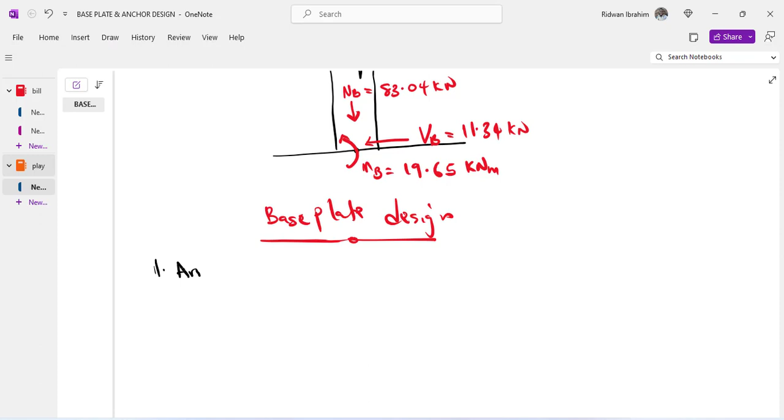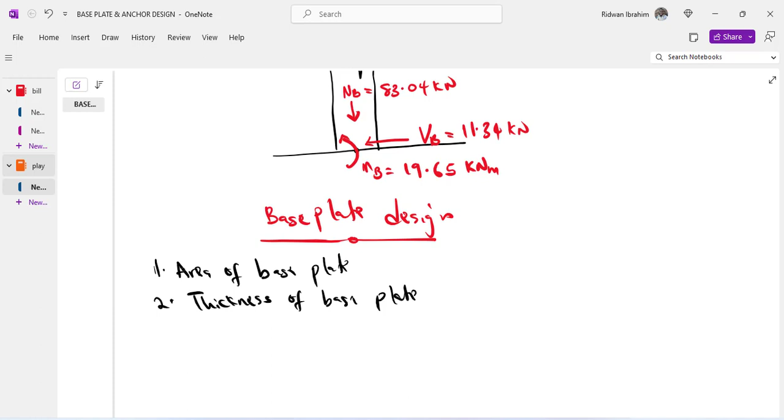So when we say we want to design a base plate, what does that actually mean? What are we designing in base plates? So we are only designing two things in base plates. Let me change the ink. So the first thing we are designing is the area of base plate, and second thing we are designing the thickness of base plates, and that is all. These are just the two things we want to have.

You can't just say, okay, let the surface area be 200 by 200 and use a thickness of 5 mm. No, you can't just say that. You have to show us the structural calculation so that we can know that this is enough. Because if the base plate is not adequate, then there's no how the axial force coming from the column will be distributed. If you have axial force, you need to first of all distribute it over an area, right? So if that area is not wide enough, then you are not doing anything. So that is what we mean by base plate design. We are trying to get the adequate area, and then we are also trying to get the adequate thickness.

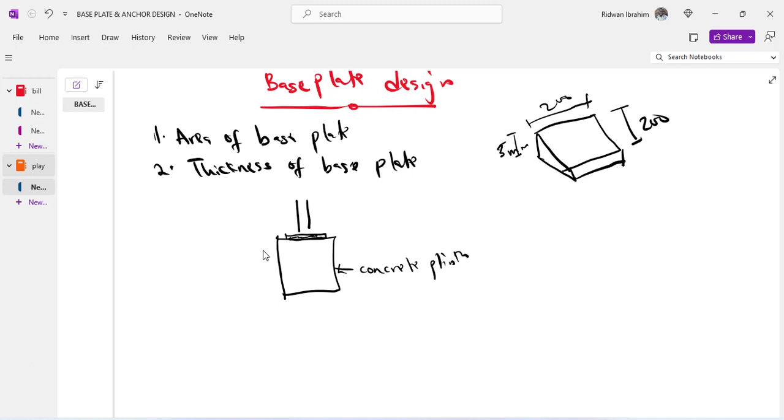So the first step in doing this analysis is that we need to know the bearing pressure of the base plate. So basically, when you have a base plate, let me have a kind of elevation. So this is my plinth, which is concrete plinth, right? And then you have your base plate on it. So you have base plate, and on this base plate we have the UC beam, and then this UC beam most times will be welded to the base plate, so that's the connection between that.

And then the base plate will now have to be connected using anchor bolts, right? So the two things we are trying to design here, we are trying to design the base plate and we are trying to design the anchor bolts. So that is the scope of this structural analysis. So now if you see this, the base plate is actually sitting on the concrete, right? So the bearing pressure is the pressure at the base of the base plate. So if this is the base plate, we're expecting that there's a pressure under it, right?

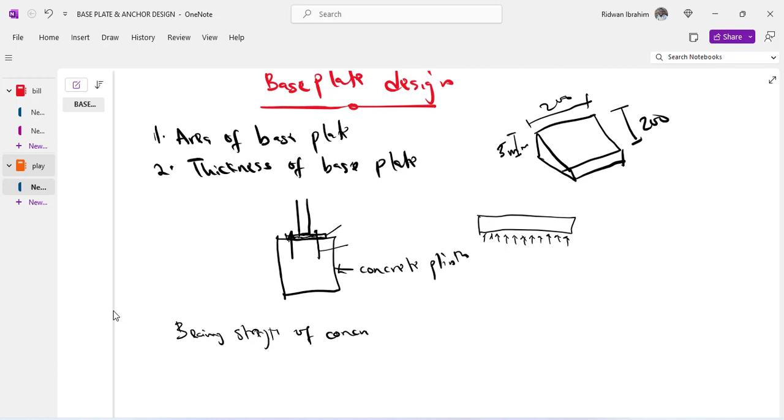And that pressure is a function of the kind of material it is supported on. So if it is supported on a concrete plinth, you are expecting a particular kind of pressure. If it is supported on masonry, you are expecting a kind of pressure. If it's supported on mortar, you are expecting a kind of pressure. So we have to know what the bearing pressure under the base is. So I would just say the bearing strength of concrete plinths, the concrete plinth is what is supporting the base plate.

So that is equivalent to 0.6 fcu. You can check the Eurocode for that, and we have said our fcu is 30 N/mm². So now I want to calculate the area of the base plate, and in order to calculate the area of the base plate, I first of all need to know what the effective area of the base plate is, because it is the effective area of the base plate that will give me an idea of what the area is. So what do I mean by effective area?

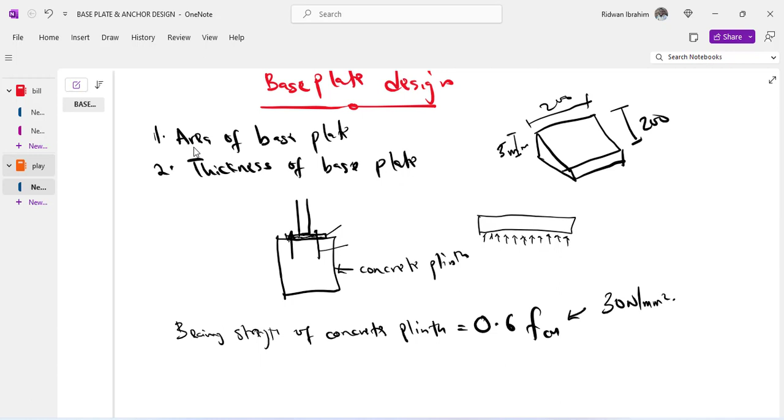So this is what it means when you have a UC beam. Obviously it is a UC column that is connected to the base plate, right? So I will just have like a plan view. So if you have the UC column like this, that UC column that is connected to the base plate, what I'm saying is that the effective area of this is something around like this.

Okay, so the effective area of the base plate is expected to take the shape of the element that is attached to it, because that element is applying the pressure. So if this is our UC beam, as I said, from a position up to here, which is called C, I know that the pressure coming from this base plate will not pass a particular distance upward here, and that particular distance is called C. Also, from the side here, the exact thing it will apply here is like C. Also from here to here, C.

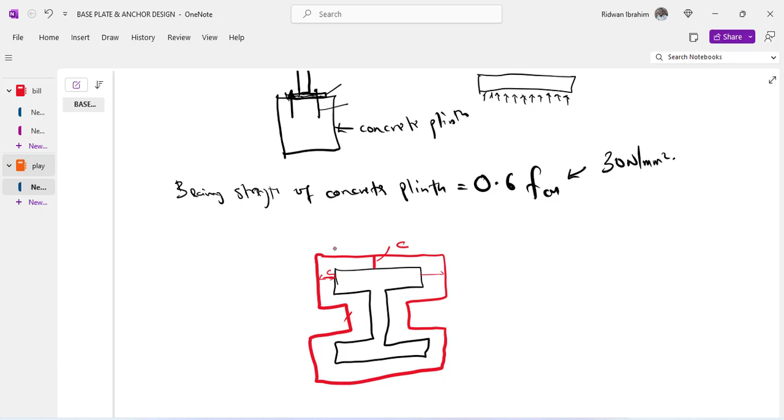Okay, so we can say that the distance from here to here we can call 2C plus small t. I already said that from the edge of this column to this position is C. Also from this position is C. I know that the thickness, which is the web thickness, is called t, right? So this is C plus C plus t. So that is 2C plus t.

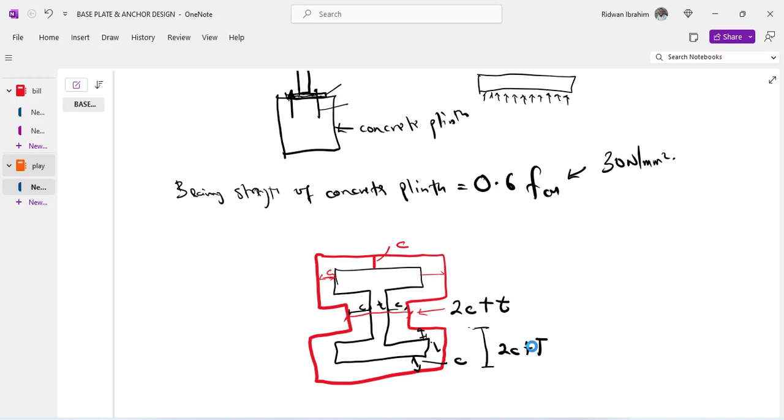All right, good. So the distance from here to here is C. The distance from here to here will be 2C plus big T, right? Because from here to here is C, also from here to here is C, and also this is big T, because the thickness of the flange is called big T. What I'm saying is that when you have your UC beam,

around here you are expecting that the pressure this will exert on the base plate is somewhere around like this. It will take the shape, right? All this shaded area. So all this shaded area is the effective area. So since you know that this is the effective area that the pressure of this base plate will be having, you are not expected to have your base plate anywhere in this shaded area.

So your base plate cannot be like this. If the area you are providing for your base plate falls inside this effective area, then it has failed, because the pressure exerted on the base plate from the UC beam is actually spread over an area wider than this. So this has failed. Do you understand that? So the area you are meant to provide has to be equivalent to this effective area or more. Definitely it has to be more. So the area you'll be providing must not fall inside that effective area. It has to fall outside.

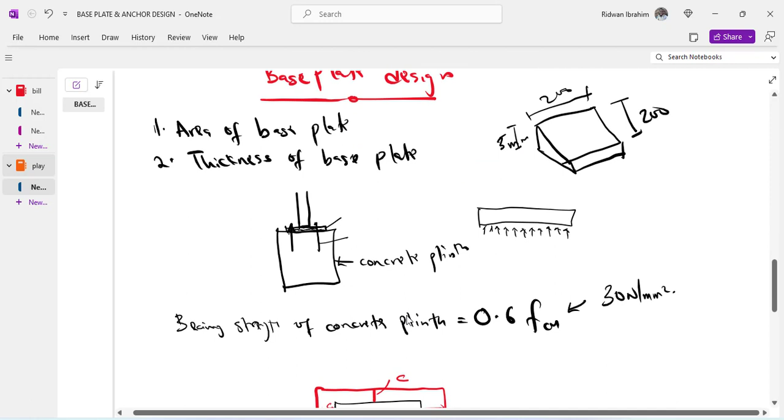So as I've said earlier, we need to know the pressure under the base, and the pressure is actually 0.6 FCU. This is the formula for the pressure, 0.6 FCU. So we can easily say that effective area is equivalent to what? Axial load from the column to the base plate. Let me just say axial load on base plate.

But when I say axial load on base plate, you know where it is coming from. It is coming from the column, and the load on the column is coming from the beam, and that is coming from the canopy. So it's equal to axial load on base plate divided by what? Divided by pressure under the base plate, which is the bearing strength of concrete, right? Bearing strength of concrete, or you can say pressure under the base plate.

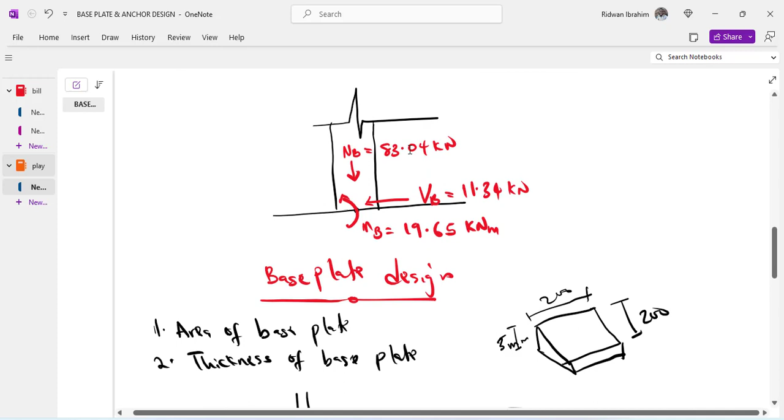Okay, so what is the axial load? That is 83.01. Let me see, 83.04, sorry. So that is 83.04, that's in kilonewton. So I want to multiply that by 1000 in order to convert to Newton. Don't forget that your bearing strength is in Newton per millimeter square, so I have to convert this to Newton too. So that's why I multiply by 1000.

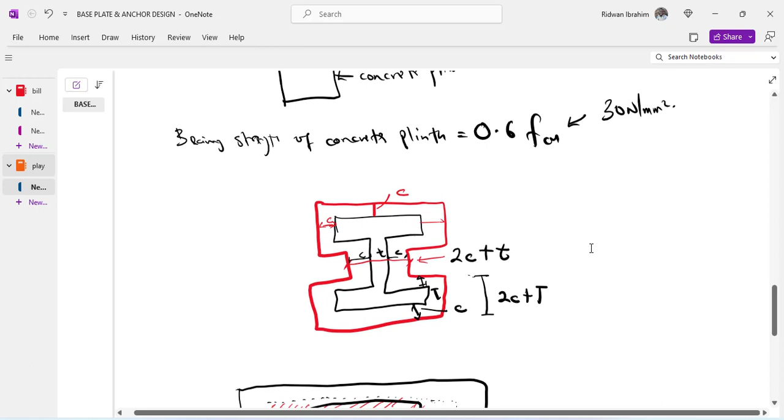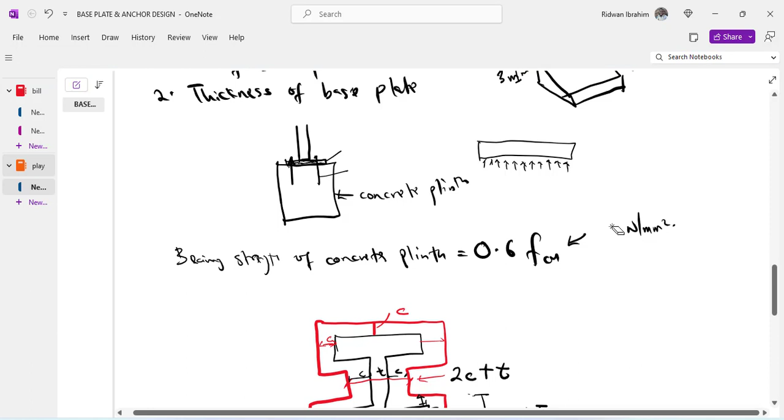And what's our bearing strength? I already said it, that it is 0.6 FCU. And what's our FCU? 30. Sorry, I'm just realizing that in the calculation that I have here, the FCU I use is 15. Okay, so I don't want to change that, because I will have to be pressing my calculator one more time, which I don't want to do. So I'll just change this back to 15, because I want to be picking the value from what I've calculated.

So from there, my effective area will now be equivalent to 9226.7 millimeter squared. Okay, so this is my effective area. This is what we just calculated. All this shaded area in red, that is the total area, effective area. So that is good. However, don't forget that we need to know the value of this C. Since I told you that from this position to this position is C, this is 2C plus T. So you can just have your kind of equation to get that.

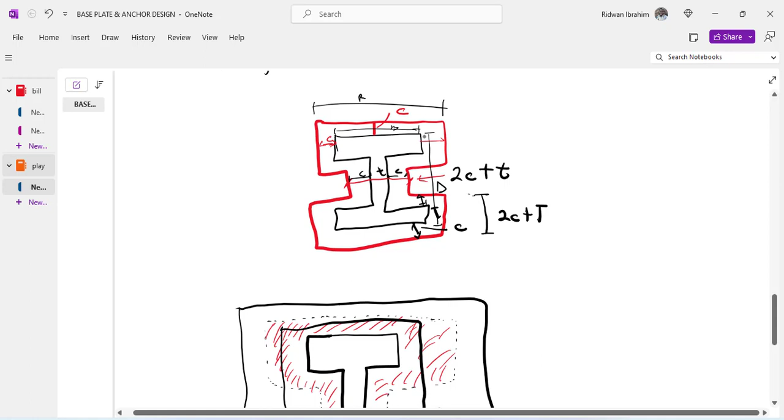Let's say for example, from here to here is B, right? From here to here is big D, right? Okay, so you can easily know that from here to here will be B plus 2C. Do you get that? And also from here to here will be D plus 2C. So you can just try to close this small portion down, and then have this. So this side is nothing but 2C plus T. So you can have three areas like this, right?

Here what you have is 2C plus T, and here what you have is B plus 2C. So you can get the area of this place, because this is a rectangle, so that's length times breadth. So B plus 2C times 2C plus T, you have the same thing here as well, right? So what is going to be the height of this? If the total length of this place is D plus 2C, then this will be D plus 2C minus 2 (2C plus T). That will be the height. And the width will be 2C plus small t.

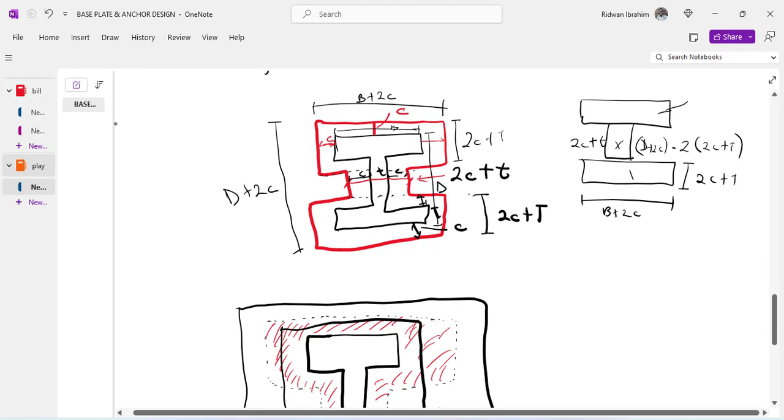So it's now left to you to calculate the area here, here, and here, and add it up. Okay, so you just need to do that small mathematics. That is what I'm trying to say, that you derive the equation here. So I would not go into that, but I think I've explained how you are going to get that. So I will just write out what I have derived.

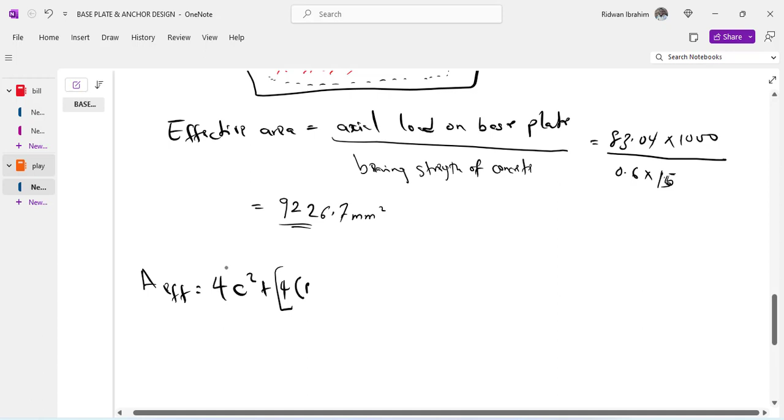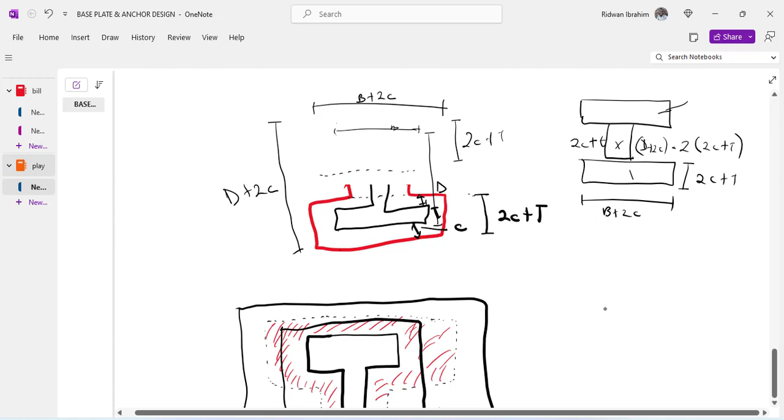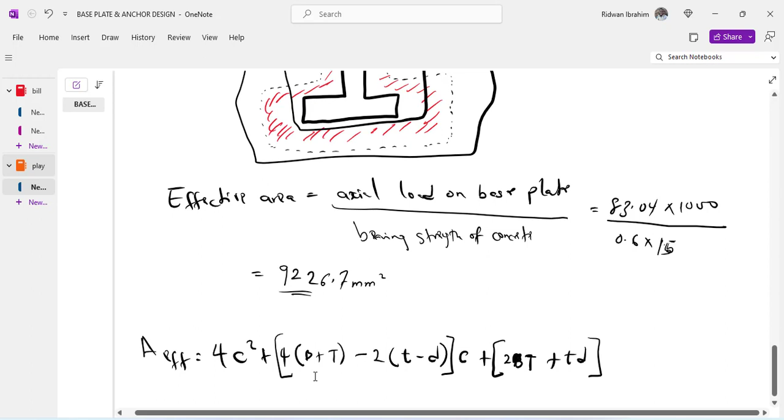So if you check textbooks, you might see that the way they write this formula is quite different, but at the end of the day it is still the same thing, because I have tried to put it in some bracket. Maybe they expanded the bracket. So you just need to derive that. Okay, and the easy thing is that all of this from here to here is basically the column perimeter.

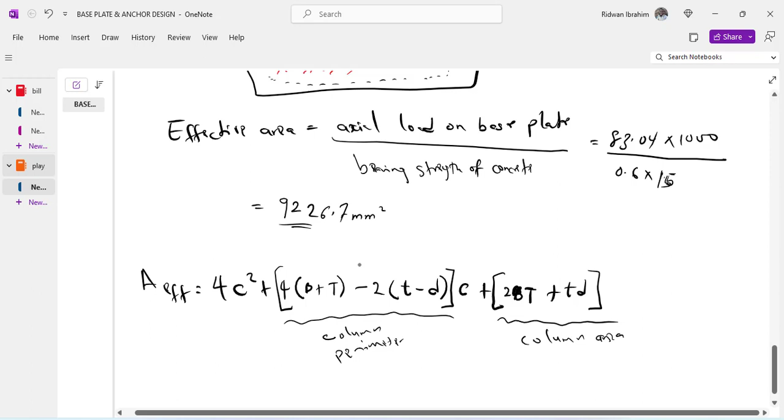Yeah, and all of this here is nothing but the column area. What I mean, the UC column. Okay, that's UC column area. This small equation, you can call it maybe equation 1. Okay, so I've already calculated what the effective area is, which is this.

Now we know what B is, we know what T is, we know what small t is, we know what small d is, we know everything. The only thing we don't know is C. Okay, what's our B? Don't forget that the section is 203 by 203 by 46, right? So you can just check your blue book so that you can get the steel property, or you can check online. Okay, so let's check it up online.

I'll just say UC properties, UC column section. Okay, so let's use this Rainham steel. Let's look for our section. Our section is 203 by 203 by 46. This is our section, right? Okay, so if you check, your mass per meter is 46.1. So 46.1 and 46 is actually the same thing.

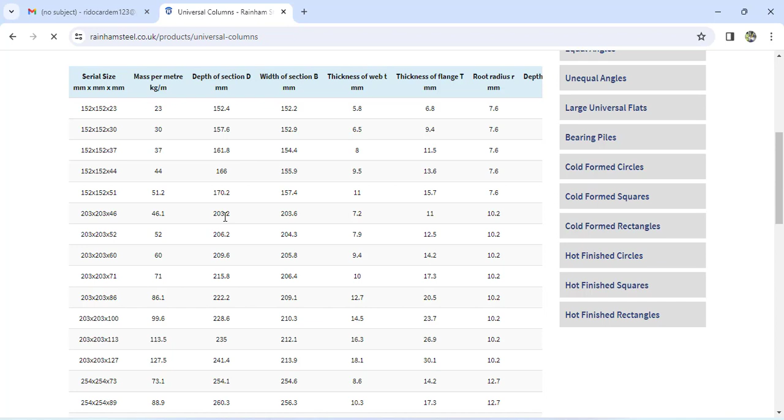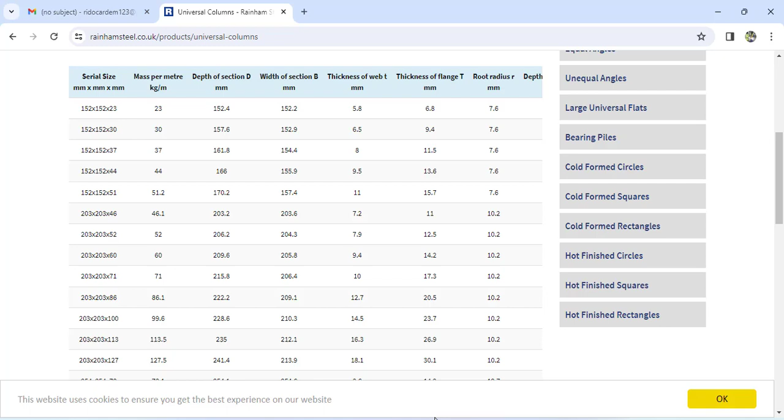And your depth of section, which is your big D, is 203.2. And your big B is 203.6. Your small t, which is thickness of web, is 7.2. Your thickness, which is big T, is 11. Okay, and I think that's all we need in this case. I just showed you so that you can easily get this from your blue book as well. So you can check blue book or online, whichever one is easy for you.

So I think my B is 203.2, okay, and the big D is 203.6, just as we checked right now. My big T is 11, which is the thickness of the flange, and my small t, which is the thickness of the web, is 7.2, and then my small d, 181 millimeter. Small d is equal to big D minus 2T.

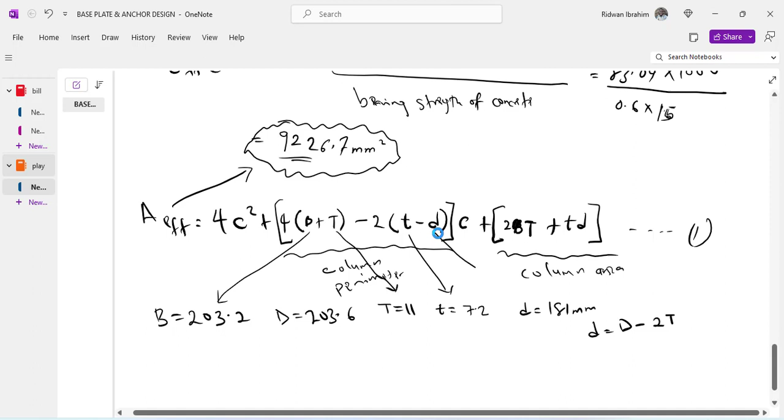So now all I need to do is put all of these values into here. You already know what your effective area is, this is the value, right? This is the value for B. This is the value for T. This is the value for small t. This is the value for small d. So you just go about that. The only thing you don't know here is C.

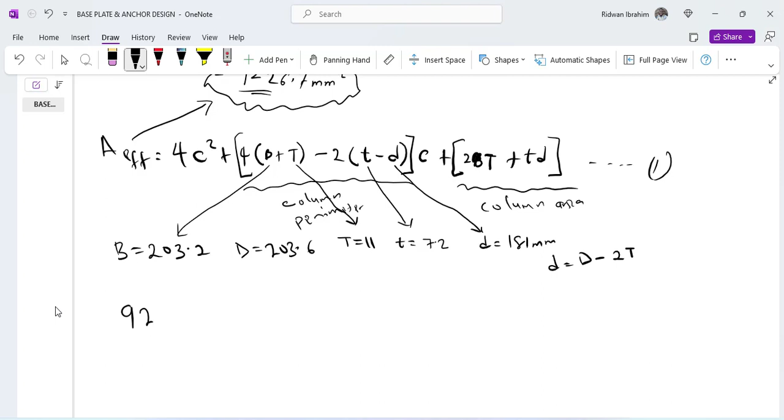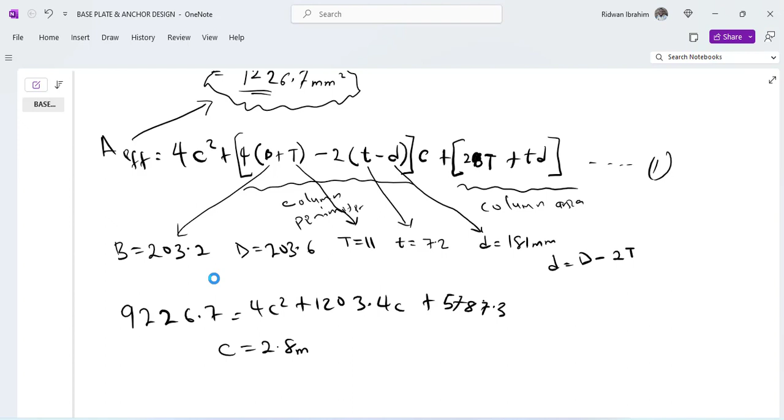So at the end of the day, when you put all of this together, I'm expecting you to have 9226.7 is equivalent to 4C squared plus 1203.4C plus 5787.3. So this is a quadratic equation, right? When you solve your quadratic equation, you'll have C equals 2.8 millimeter.

Okay, so as I said earlier, if you have your UC beam like this, I can say that my minimum area is a function of my effective area, because this time around I'm not having that zigzag shape. You don't expect my base plate to have a zigzag shape. So I'm going to have a rectangular or square plate, right? So something like this, but we are using the same concept.

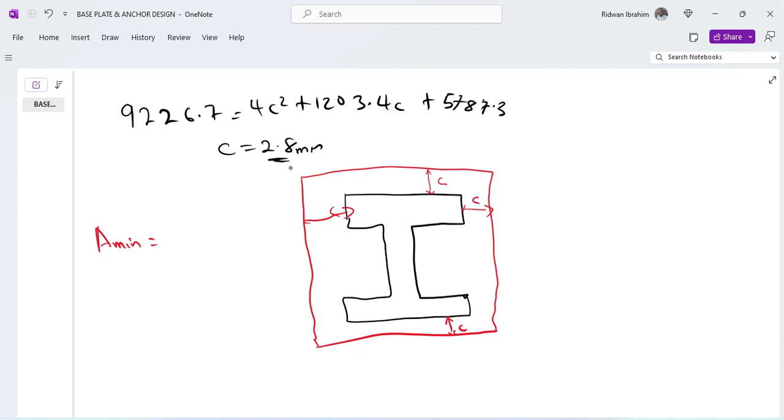I know that from here to here is C, from here to here is C, as always, and from here to here is C. So my minimum area will be equivalent to what? If you want the area of this, from here to here is B plus 2C, and here it will be D plus 2C, because you know the height from here to here is D, right?

So C up, C down. Also the length from here to here is B. So you can easily get this area. So I can say that my area, the minimum area, is equal to D plus 2C multiplied by B plus 2C, because whether this is a rectangle or a square, the area is usually length times breadth, right? I believe you understand the difference between the area minimum and the effective area.

The effective area is that area in zigzag, okay? But this time around, my area minimum, which is the minimum area, I don't expect to have a zigzag shaped base plate. So I'm going to idealize my base plate to be square or rectangle. The area of that rectangle is what I'm trying to get, which I am calling minimum area, and that is as a function of the effective area. So if you put your D here, you know what D is, you know what C is. C has been calculated already.

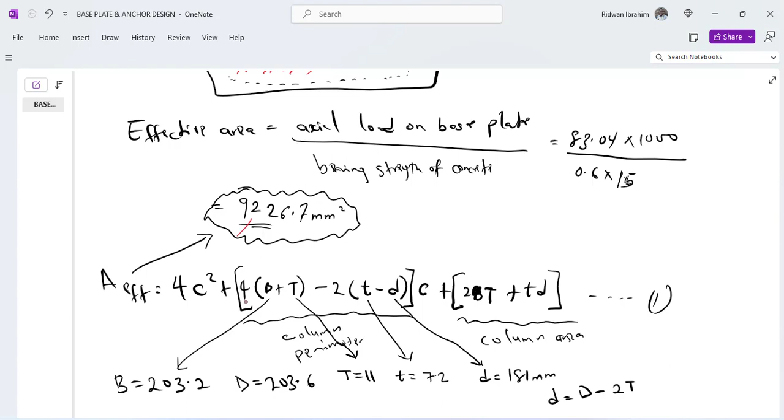So my area minimum, which is minimum area, you can easily calculate that to be 43,514 millimeter squared. So you can see that my area minimum is actually greater than my effective area. My effective area is 9,000, while this one is 43,000.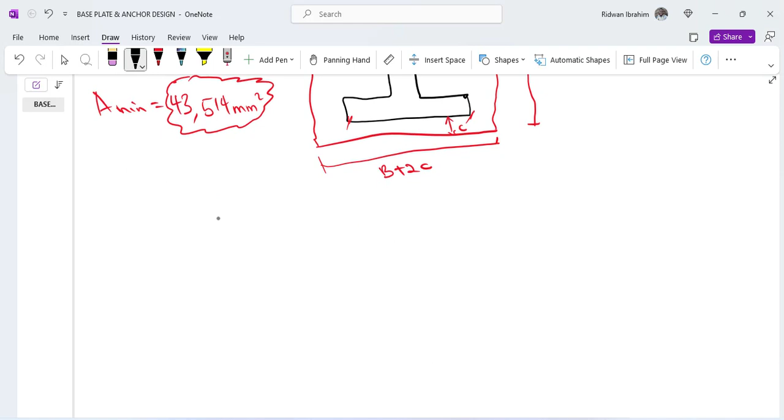So what the minimum area simply means is that when you have your UC beam like this, and your effective area, which is a function of C, your effective area is this total area within the shaded part. The shaded area here is your effective area. Then my minimum area is just this plate like this, just idealizing everything. So that is minimum area. The void inside is no more void, because it has now been added in the minimum area. You understand that now? Area provided has to be something like this.

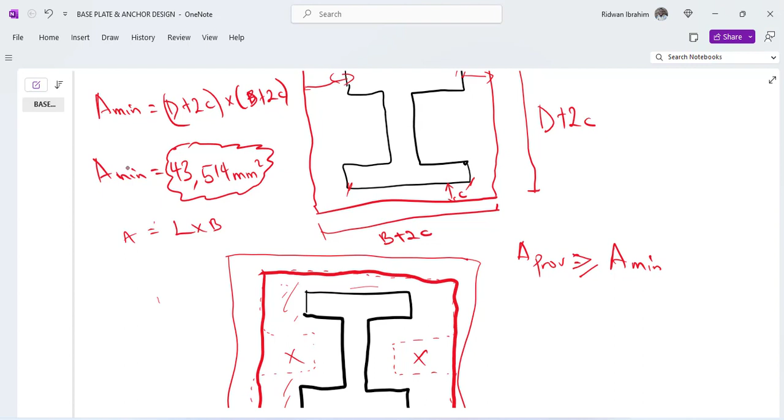So the area you provide has to be the same as your area minimum or more. The area of this plate that you provide has to be greater than or equal to the area minimum. So if this is my area minimum, I can easily convert this to length and breadth. Because area is equal to length times breadth, I can just assume this is a square plate. I don't want to keep using red, let me go back to black. So I will say assume square

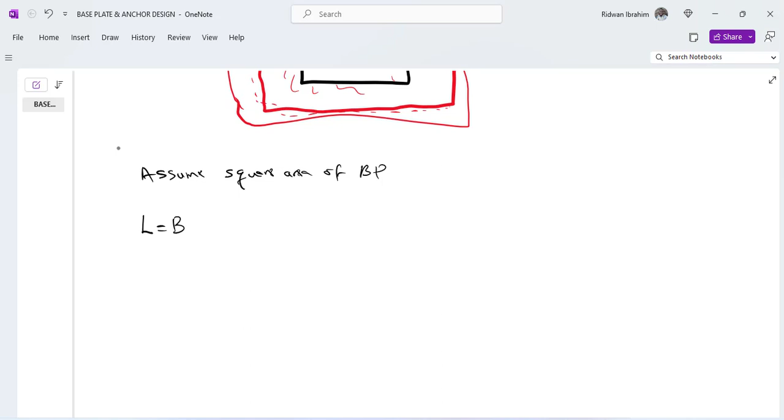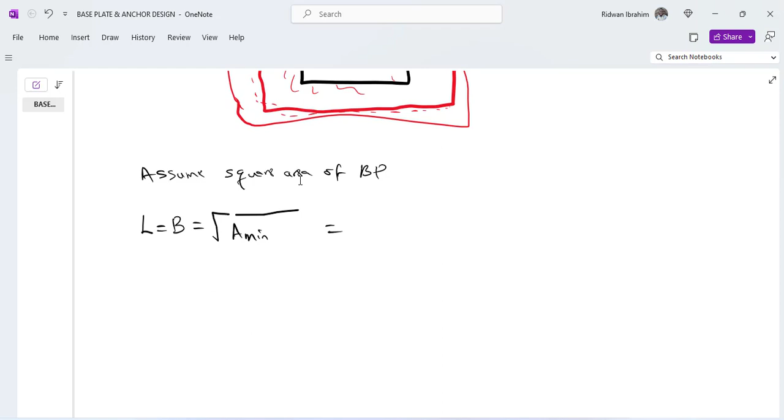area of base plate. So my length of base plate will be equal to my breadth of base plate, and that is the square root of my area minimum. And what's my area minimum? 43,000 and something. So my length will be equivalent to my breadth, and that will be 208.6 millimeter. So I can say 208.6 by 208.6 millimeter. That is the minimum dimension I can have.

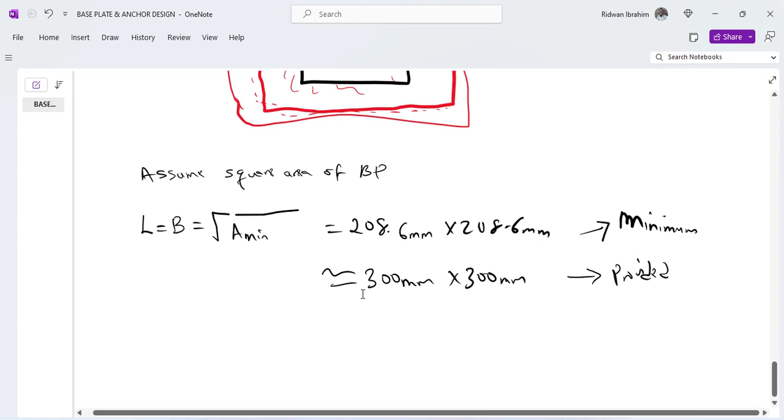So I will approximate this to, let's say, 250 by 250 or 300 by 300. I will approximate this to 300 mm by 300 mm. This value is the calculated minimum, the minimum I can have if I want to use a square plate. But this is the one I have provided, because I want something quite high, so that even if the axial load is increased from 83 to 100, this area will still be able to satisfy it. You can't just use the exact value you calculate, which is the minimum.

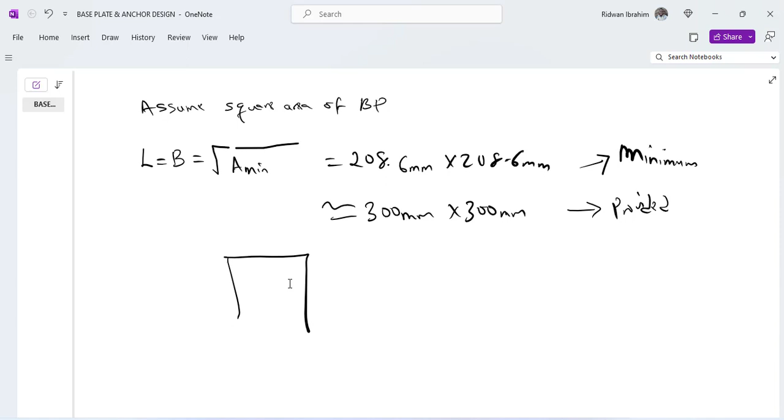So from design, we have easily calculated our area of base plate to be 300 by 300. We have successfully done this one. So we need to do the other one, which is the thickness, because we also need to know how thick the base plate is. So let's go to the thickness part.